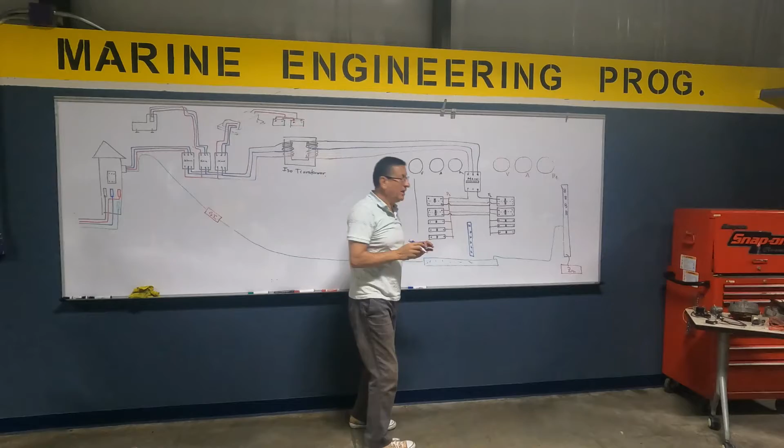This phase. This is phase 1, and this is phase 2. The neutral, you have a neutral bus bar here, in the middle one. In the single breakers, you only have the phase. The neutral goes directly to the equipment. The neutral is not interrupted in the breaker.

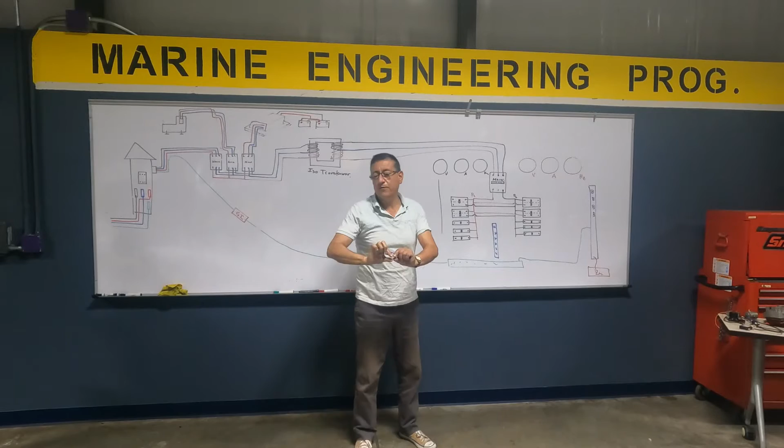If you have a panel, Fausto, you have single breakers. With that single breaker, you interrupt only the hot. The neutral is coming from a common neutral bus bar. That one is coming here. Yeah, of course, it's coming from the neutral.

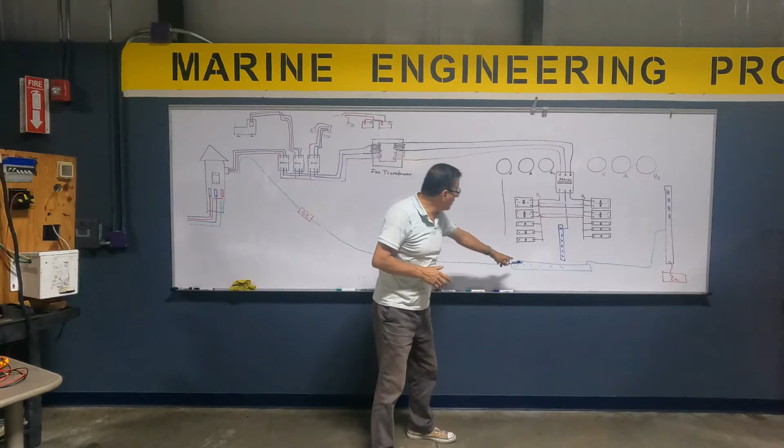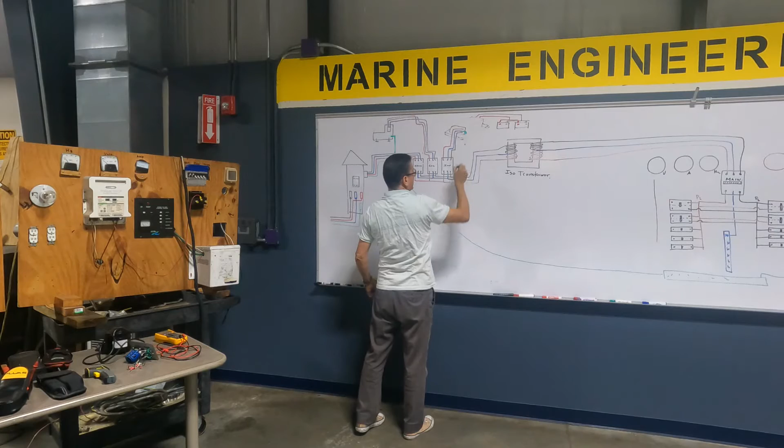It's neutral. And this ground is coming from the original ground, and coming from the ground of the generator, because the generator produces its own ground here, and that ground enters here. And this element produces its own ground here. At this point, both of them are connected together, and after that goes and enters here. Everybody follow me? All of those connections of the ground should be before the galvanic isolator.

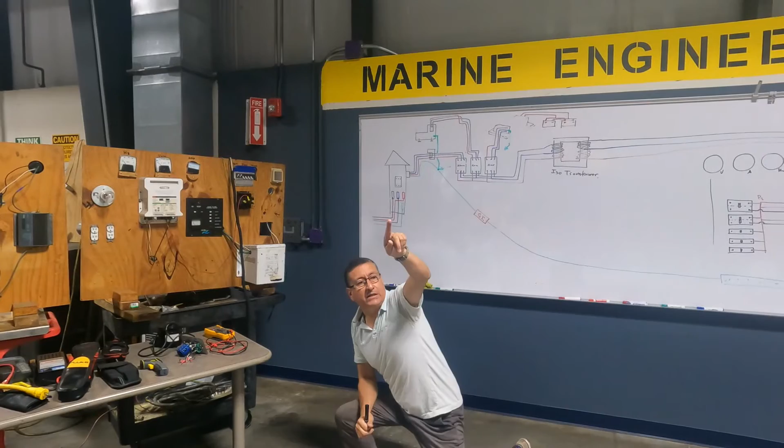Where is the galvanic isolator normally located in a boat? Okay, it's pretty close to this one. Inside of the boat, you check in the wall, in the engine room. Oh yeah, this is the outlet. Okay, it's here. It's pretty close to the outlet. It's separated 2 feet, 3 feet maximum.

Be careful, because in some boats, some manufacturers, in between the outlet and the switch selector, install other main breakers for safety. And it's very common. You say, I don't know what happened. I have power in the shore power cable. The shore power cable entered the boat, but I don't have power in the boat. If you follow, the outlet is hiding another breaker. Okay, good. This is the configuration.

We are going to connect exactly the same like we did in DC. We are going to connect the voltmeter, volts. How do you read volts, my friends? In parallel. You connect hot with hot, neutral with neutral. When you have the multimeter, you select volts AC, with the sine symbol, and normally the black one is in the small terminal in the hot, and the red one in the neutral. But you can connect it opposite, no problem. All right, for AC.

In that case, I want to see the voltage in the voltmeter in phase 1. All right, the voltmeter in the first one is connected. Phase 1 hot and neutral. And the other one? Neutral. Enters here in the neutral. Ready? The second one. Same thing. Voltage enters here, and neutral through the neutral. Good? To the neutral bus bar.

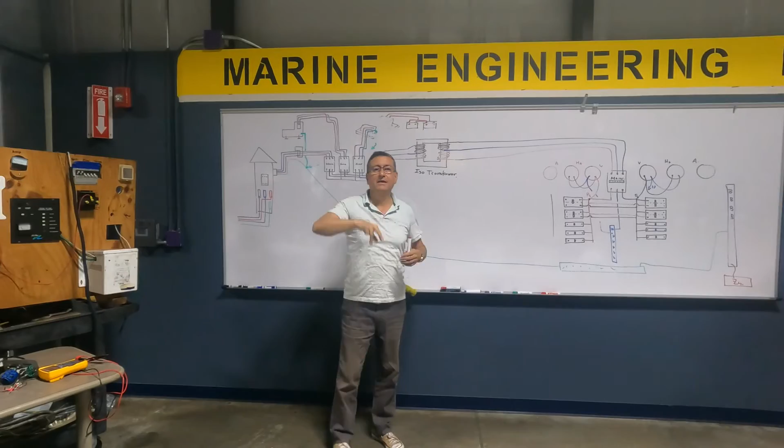You remember how we connect the ammeter in DC? With a shunt. Basically you interrupt the positive and you insert the ammeter there. You put the shunt for protection. But really, you cut it and you read amps, where you can read the consumption in amps of one specific device, in the breaker for that device, because the breaker interrupts the positive cable. At that point, I can use my ammeter.

You remember that I mentioned that in DC there are clamp ammeters, but the clamp is not accurate. Why? Because this one is a magnet, positive and negative, you see? When you pass a DC signal, the signal is straight. And depending on the insulation of the cable, the reading here is erratic.

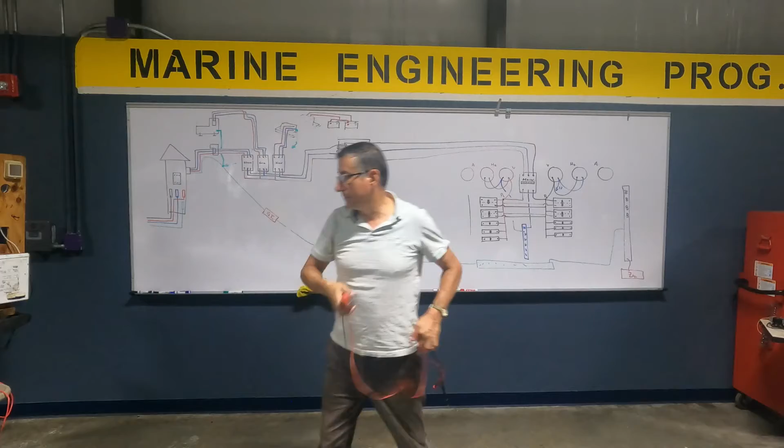In AC, no. If I have a clamp and I pass it through the hot line, what is the shape of the wave? Beam, beam, beam, beam. When the signal touches, you read amps. You read the flow easily. In AC, the best tool to read amps is the clamp.

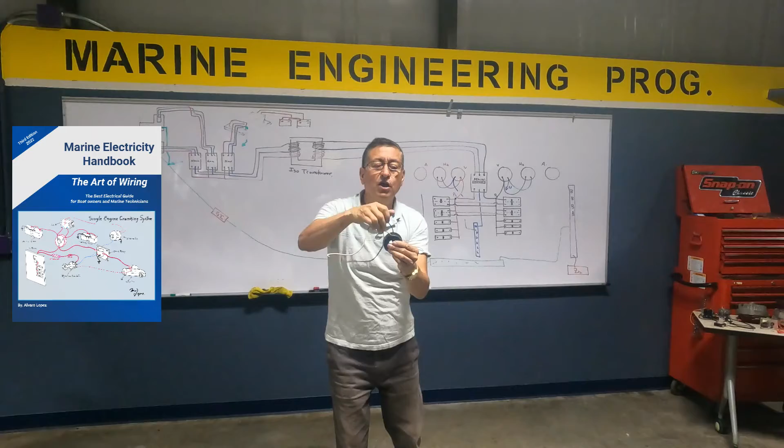Mr. Lopez, to install the ammeter in the AC panel, I need a clamp? Okay, I am going to install one permanent clamp through the hot line. This is the donut. I am going to install one donut here in the hot line and another donut here in the other hot line. And those cables go to the gauge. Internally, the donut is a magnet with a coil.

This donut is for this gauge that is 30 amps. The other gauge has another donut. The donut is the brother of the gauge. When you buy the AC amps gauge, the gauge comes with its own donut. Look at this. This is the donut for this gauge. You see the donut? This is the donut for another gauge, a big one, more capacity. It's clear? The donut is the clamp.

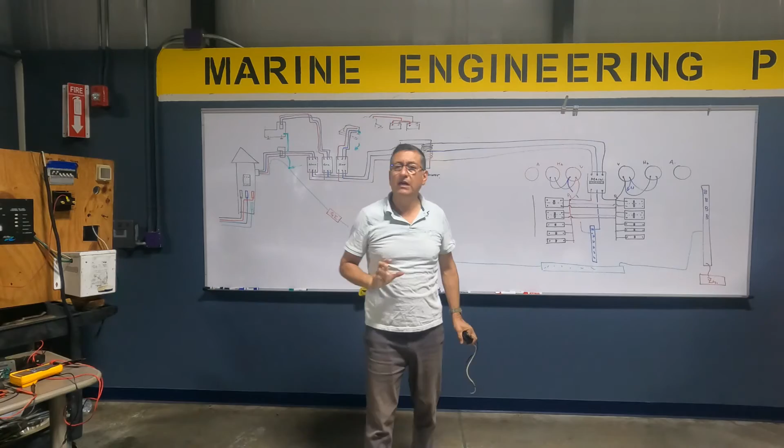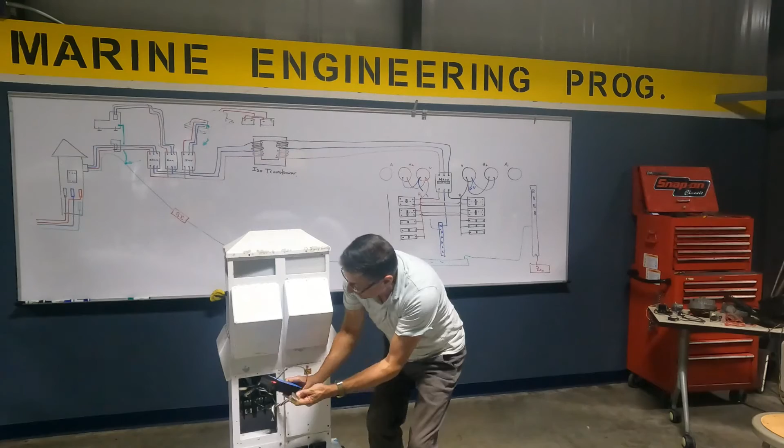It's the clamp. In the pedestals, you have individual donuts per phase. Look, donut for phase 1, phase 2, and phase 3. And this computer, located here, is connected with the watt meter. The manager of the marina, at the end of the day, takes the picture of the consumption of this boat for the bill. At the end of the project, you call the manager of the marina: hey, my friend, can you prepare my bill because I leave today?

And according to those readings, day per day, they calculate your consumption in amps at that pedestal, and you pay. Because with this consumption in amps and the voltage, you have the power. Power is voltage times intensity. Simple. Okay, all right. We are going to install.

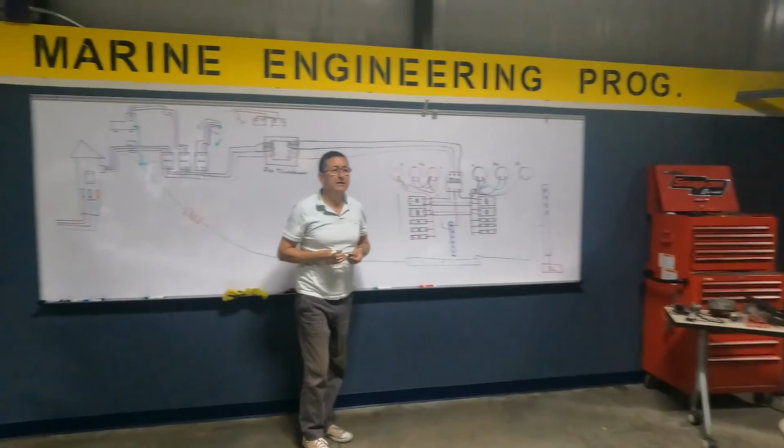And here I am going to locate my donut, and my donut has two wires. All right, and I am going to connect. The other donut is here. And the cable goes here and here from the donut. Two donuts, one for each phase. And this is the ammeter. This is the hertz. This is the voltage.